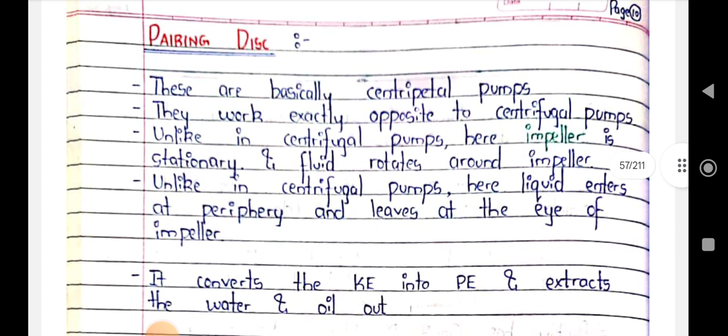Then the paring disc. Paring discs are basically centripetal pumps. They work exactly opposite to centrifugal pumps. Unlike a centrifugal pump, here the impeller will be stationary and fluid rotates around the impeller. And unlike in centrifugal pumps, liquid enters at the periphery and leaves at the eye of the impeller. Here they convert kinetic energy into potential energy and extract the water and oil out.

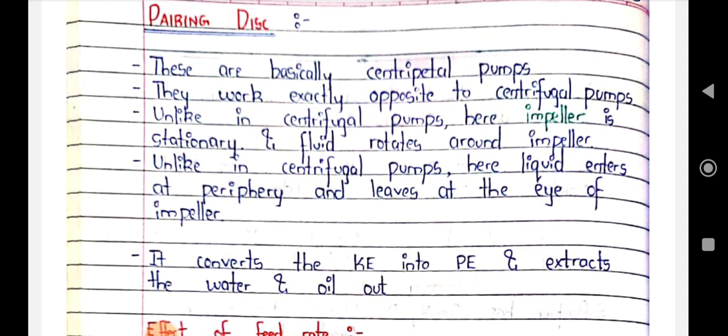So a quick review about the paring disc: they are basically centripetal pumps. They work exactly opposite to centrifugal pumps. Unlike centrifugal pumps, here the impeller is stationary and fluid will rotate around the impeller, and the liquid enters at the periphery and leaves at the eye of the impeller. Here they will convert kinetic energy into potential energy and extract the water and oil out.

So what are the effects of feed rate? Here we will discuss two scenarios. If the feed rate or throughput is high, then the purpose of oil remaining inside the bowl for a long time for better separation will be lost, and that's why the interface will move out and oil will overflow to the water side.

If the feed rate is too low, then the interface will move in, and water will get carried over to the oil side. These are the effects of increase and decrease of the feed rate.

Then the effect of back pressure. If too much back pressure is there, then the interface will shift out. That means there is a chance of overflow. If the back pressure is less, then the interface will shift in, and there is a chance of carry over. The manufacturer's recommended back pressure and feed rate should be maintained.

If too much back pressure is there, the interface will shift out and a chance of overflow will be there. If the back pressure is too low, the interface will shift in and carry over will be there.

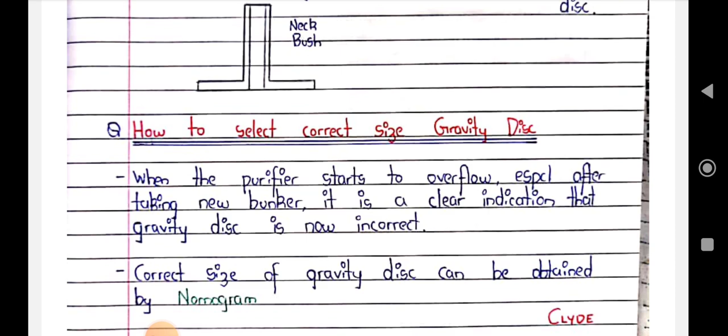So how to decide the size of the gravity disc? Here is the picture of a nomogram. Here there will be specific gravity, separation temperature, gravity disc size and flow rate. Flow rate is also called throughput, that is, how many liters can be supplied per hour.

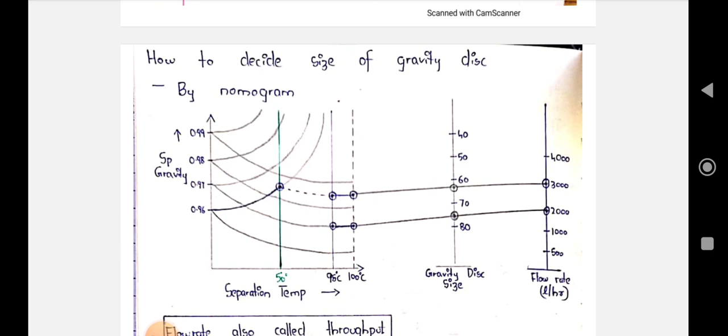Here we can see 0.96, 0.97, 0.98, 0.99, different values of specific gravity, on the basis of temperature: 50 degrees Celsius, 95 degrees Celsius and 100 degrees Celsius, and the gravity disc sizes 40, 50, 60, 70, 80 and so on, and flow rate. In the BDN we can get the fuel specific gravity.

Mainly in the BDN they will mention specific gravity at 15 degrees Celsius or specific gravity at 50 degrees Celsius. So for specific gravity at 15 degrees Celsius, they will follow a downward curve.

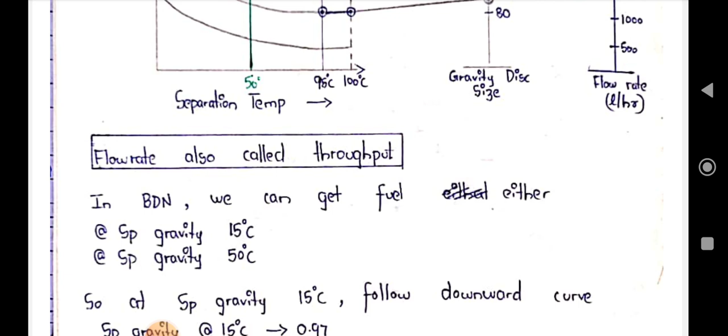So the specific gravity at 15 degrees Celsius is 0.97. The separation temperature will be around 95 degrees Celsius and flow rate will be 2000 liters per hour. So if you consider specific gravity at 15 degrees Celsius, you will follow a downward curve: specific gravity at 15 degrees Celsius is 0.97 and the flow rate is 2000 liters per hour, so the gravity disc inside diameter will be 75 mm.

When we take the specific gravity at 50 degrees Celsius, it will follow an upward curve. Then on the downward curve, specific gravity at 50 degrees Celsius will be 0.96, separation temperature will be 95 degrees Celsius and flow rate will be 3000 liters per hour. So gravity disc inside diameter will be 62 mm. So we have to follow the upward curve up to 50 degrees, then follow the downward curve.

That is the picture. So what we are trying to say is, from the BDN we can get the fuel specific gravity, mainly at 15 degrees Celsius and at 50 degrees Celsius. If it is the specific gravity at 15 degrees Celsius, we follow a downward curve, so the gravity disc will be 75 mm. If we consider 50 degrees Celsius, the graph will be an upward curve, so the gravity disc size will be 62 mm.

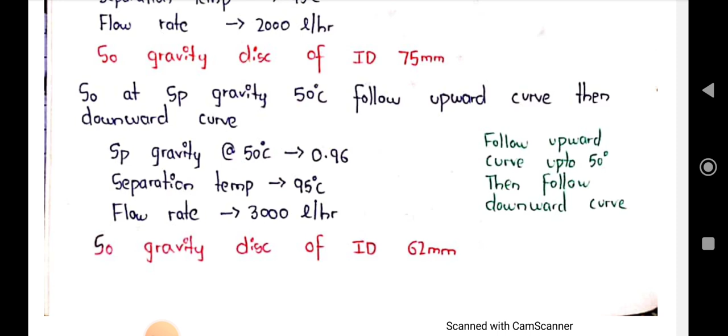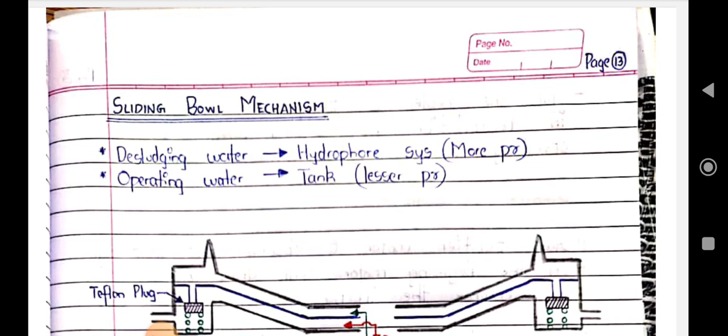So here two main mechanisms, sliding bowl mechanisms, are there. We know that we will be supplying operating water and de-sludging water. Operating water will be supplied from a small header tank, where pressure will be less, but the low-pressure flow should be maintained continuously. So mainly gravity. De-sludging water will be from the hydrophore system, so it will have more pressure. Okay.

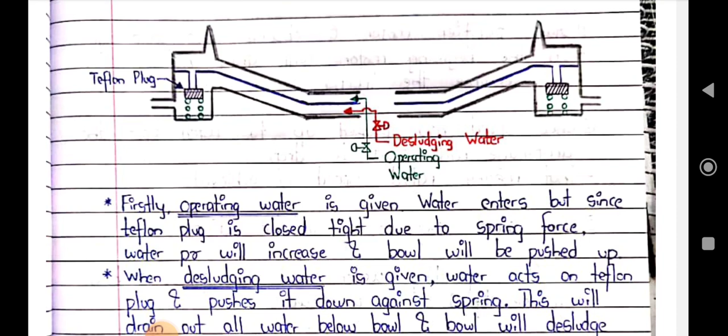Here firstly operating water is given. The water enters, but since a Teflon plug is provided, it is closed tight due to spring force. As the water pressure increases, the bowl will be pushed up. When de-sludging water is given, the water will act on the Teflon plug and push it down against the spring, and this will drain out all the water below the bowl and the bowl will de-sludge.

So when we say operating water and de-sludging water, what is happening is, inside the bowl, operating water is given, then water enters, but the Teflon plug is closed tightly due to spring force, so water pressure will increase and the bowl will be pushed up. When de-sludging water is given, the water will push the plug down against the spring. So it will drain out all the water below the bowl and the bowl will get de-sludged.

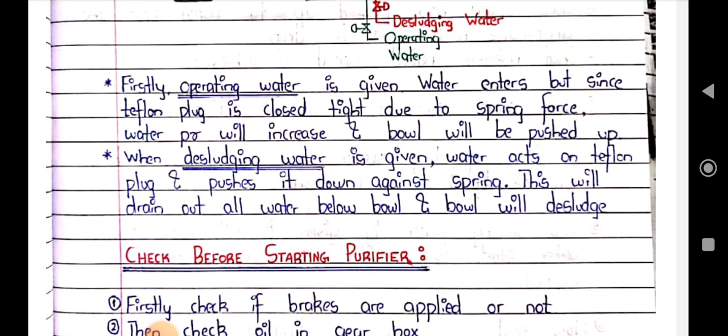So what are the checks that we need to do before starting the purifier? Firstly, we need to check if brakes are applied or not, and we have to check oil in the gearbox. We have to check the control air of the three-way valve is opened. Then we have to check and open the pump inlet valve, and open heater outlet and inlet valves. We have to ensure operating water valves are open. Check if the sludge outlet valve is kept open. These are the basic checks before starting the purifier.

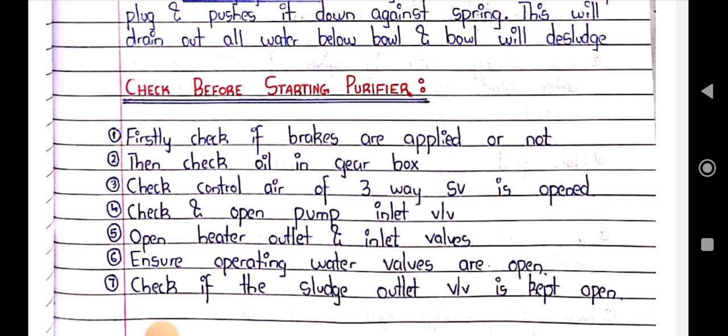Firstly, check brakes are applied or not. Then check oil level in the gearbox. Check the control air of the three-way valve is opened. Check and open pump inlet valve. Open heater outlet and inlet valve. Ensure operating water valves are open. Check if sludge outlet valve is kept open. Then start the heater and pump. Let the oil go into recirculation via the three-way valve until it gets heated up to the operating temperature.

The starting procedure. Here mainly the purifier motor is started. Start the purifier motor, and we have to observe the amperage. In the beginning, the motor will draw heavy current to overcome the inertia. Once speed reaches the rated RPM, the amperage will start to drop. This means the rated speed is achieved. Now the start sequence will be displayed.

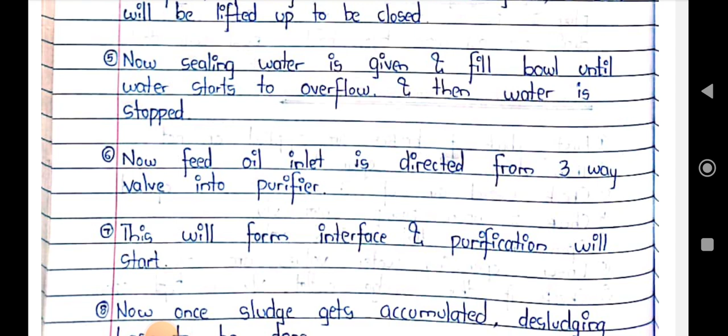So first here we will be giving operating water, and the bowl will be lifted up to be closed. Now sealing water will be given to fill the bowl until water starts to overflow. Then the sealing water will be stopped. Now our feed oil will be supplied. It is directed from the three-way valve into the purifier. This will form an interface and purification will start. Once the sludge is accumulated, we can desludge. Okay.

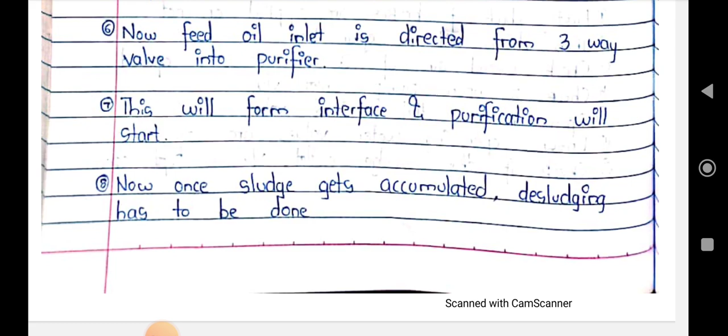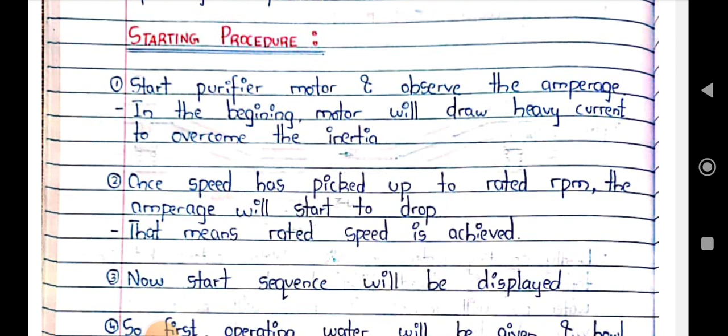So just a quick revision of the starting procedure: start the purifier motor and observe the amperage. In the beginning, the motor will draw heavy current in order to overcome the inertia. Once speed is picked up to rated RPM, the amperage will come down. That means rated speed is achieved. Now the start sequence will be displayed.

So first we will be supplying operating water, and the bowl will be lifted up to be closed. Then sealing water is given to fill the bowl until water starts to overflow. After that, the sealing water will be stopped. Then the feed oil inlet is directed from a three-way valve into the purifier. This will form an interface and purification will start. And once sludge has accumulated, desludging has to be done.

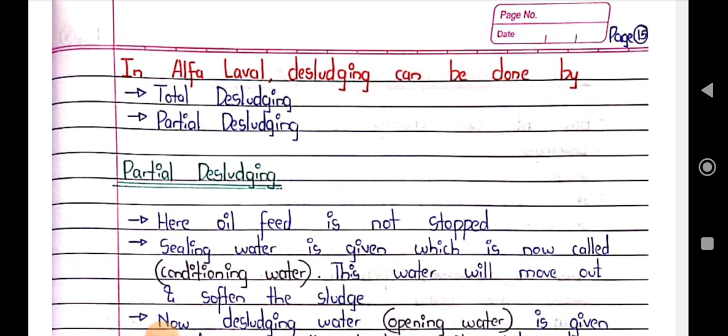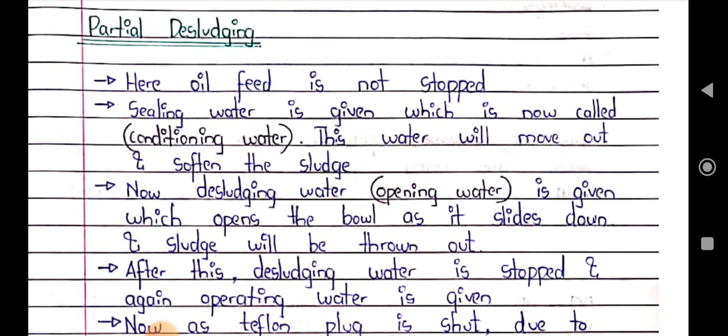In the Alfa Laval type purifier, desludging can be done in two types: total desludging and partial desludging. So partial desludging: here oil feed is not stopped during partial desludging. Sealing water is given, which is also called conditioning water. This water will move out and soften the sludge. Now desludging water is given, which opens the bowl. As it slides down, sludge will be thrown out. After this, desludging water is stopped and again operating water is given.

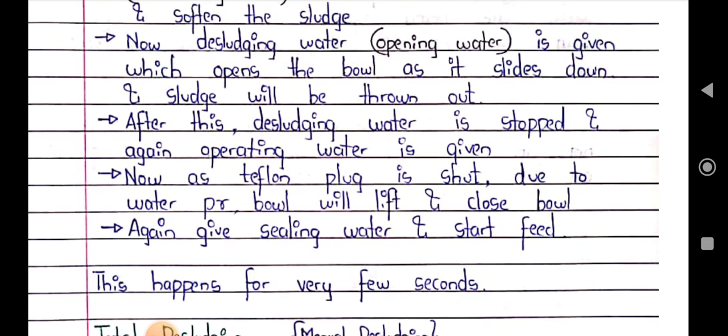Now as the Teflon plug is shut due to water pressure, the bowl will lift and close. It again gives sealing water and starts feed. So this will happen for a few seconds. Okay. Here what happens in partial desludging is the oil feed will not be stopped. We will be giving sealing water. Then this water will move out and soften the sludge. Now we will stop the operating water and desludging water will be given. This will open the bowl, and as it slides down, sludge will be thrown out.

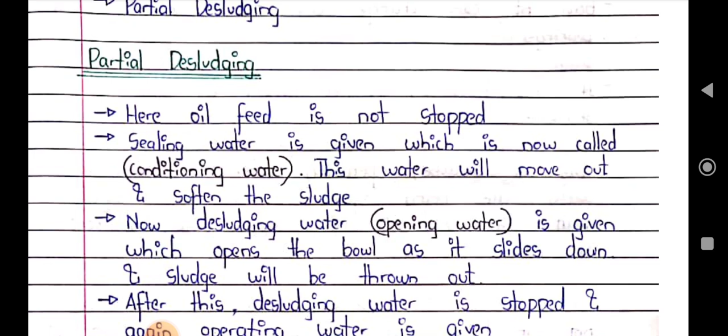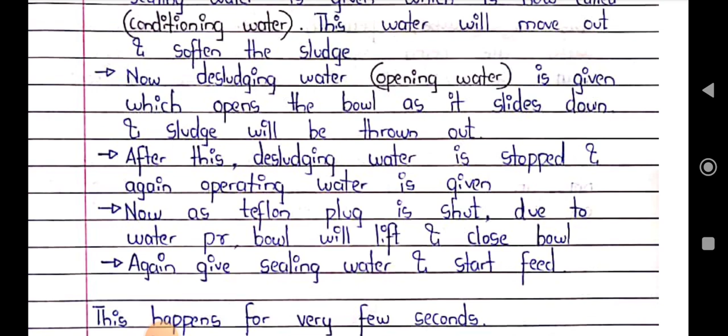After desludging, desludging water will be stopped and we will open operating water. Now the Teflon plug will be shut due to water pressure. The bowl will be lifted up and close. Again give sealing water and start feed. This will happen for a few seconds.

Then our normal total desludging or manual desludging. Here the oil feed is to be stopped. Then sealing water is given; here it is called displacement water. This will completely displace all the oil from the bowl and fill the bowl with water. Now operating water will be stopped and desludging water is given, which opens the bowl, and it slides down and sludge will be thrown out.

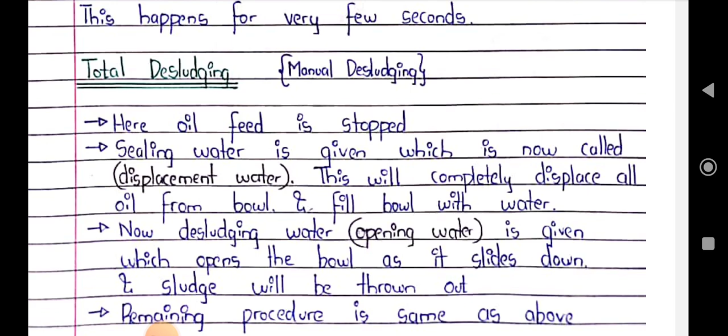Then after that desludging water will be stopped. Then we will be starting the operating water. After some time we will open the sealing water. Then we will make the bowl overflow. Then make sure that we stop the sealing water. Then we slowly open the feed. So this is what happens in total desludging or manual desludging.

What happens if the bowl height changes? The bowl height can change mainly due to bearings getting worn down. If bowl height changes, the purifier won't be able to desludge, because operating water and desludging water are being sprayed from a nozzle that is fixed and the holes are in front of it. So when the bowl height reduces, since the hole is not in front of the nozzle, water won't go in and desludging won't take place.

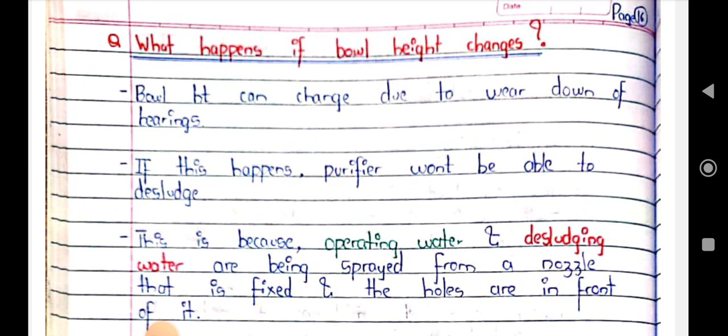If bowl height changes, mainly due to bearings getting worn down, desludging of the purifier is not possible, because operating water and desludging water are being sprayed from a nozzle that is fixed and the holes are in front of them. So when the bowl height reduces, the hole in front of the nozzle will get blocked and water won't go. That means desludging won't take place. This is what happens if bowl height changes.